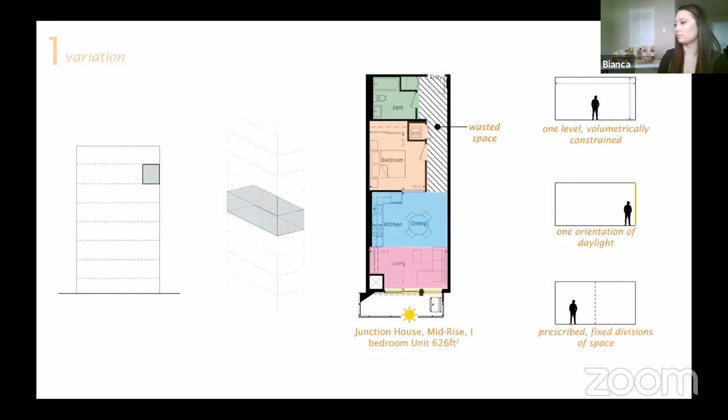This lack of variation can be overcome with what Bernard Tschumi describes as a new dynamic conception of architecture, where we reinscribe the movement of bodies into space.

When the body in space is dynamic, there is a need for attention to spatial, experiential, or behavioral variation.

The designs of our urban housing have made things easier, providing a sense of convenience. However, it has trained our bodies to maneuver around standard dimensions. And as our bodies adapt, it stops sending sensory signals to the brain.

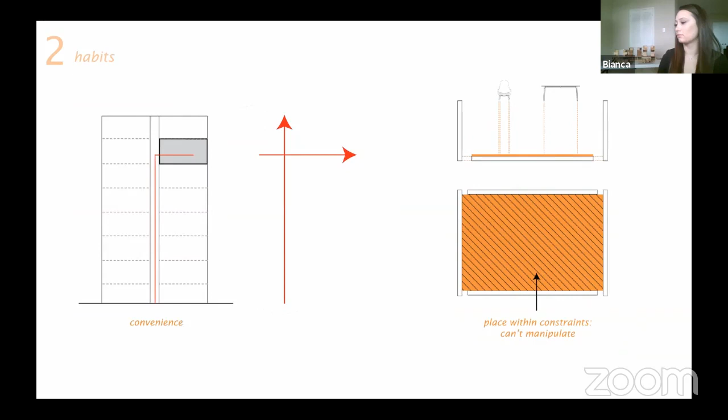It is then that architecture limits our actions and our bodies slip into indolence. It is when we treat our environments with little potential for affordances or action possibilities that our environments become limiting.

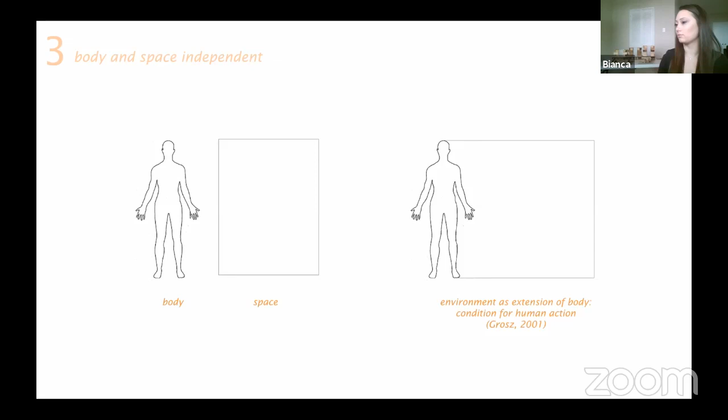By understanding that our environments are the condition for human action, designers can allow spaces to become extensions of our bodies, initiating movement and variation.

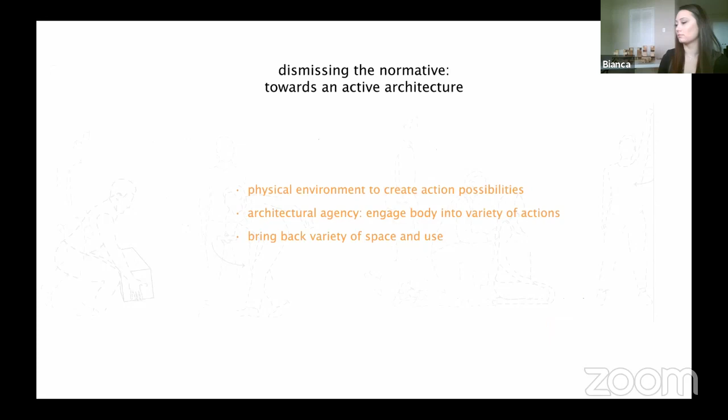To dismiss the normative ways of living in apartment housing, the role of the physical environment in creating action possibilities becomes essential, as it gives architecture the agency of engaging the body into a variety of actions, and brings back variety of space and use and well-being measures into urban housing.

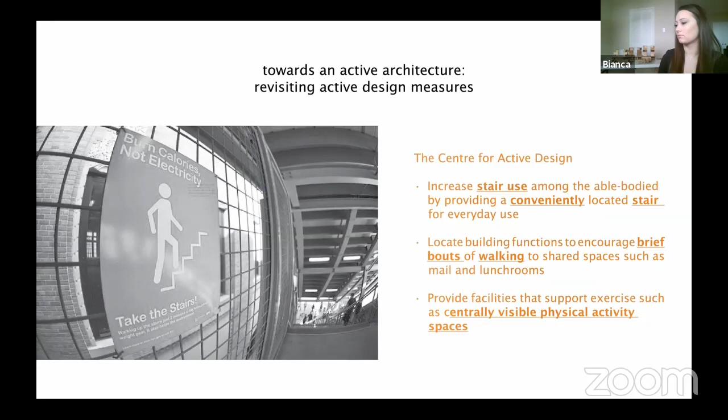To incorporate movement and well-being into our architecture, active design plays a role in providing agency to better our minds and bodies. Our current approaches to active design fail to incorporate the variety of ways which our bodies can move and their benefits. This new conception of active design engages the body through many different movements beyond walking, creating more continuity of bodily activity. This thesis tests how a new approach can use housing as an instrument for well-being, and how alternative amenities, qualities, organizations, and design of urban housing afford more physically active and socially engaged lifestyles.

James Jerome Gibson coined the term affordances so designers can understand its meaning as action possibilities within the environment, and that composition and layout of surfaces constitute what is afforded. Affordances help inform how space relates to behavior and evokes bodily sensory experiences. Most of Gibson's theory refers to affordances through the material environment.

Through design research, spatial and material affordances as it pertains to new housing forms that create new action and behavior were explored. The exercise challenged conventional apartment design by incorporating movement and variety through spaces which interweave, stagger, and afford different orientations, views, elevations, and ways of transitioning, allowing the body to behave in, use, and experience space differently.

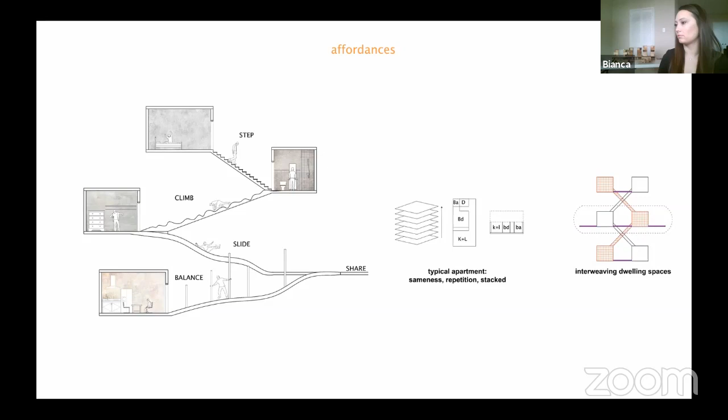To afford variety of movement, Gayle Nicoll states in her active design supplement there are three main physical movements critical for development and well-being. They are manipulative movement, which develops fine motor skills; non-locomotor movement, which focuses on the relationship of body to a place or object; and locomotor movement, which develops gross motor skills and movement of the body from place to place. Incorporating Nicoll's movements while addressing the question of circulation, design research examined active ways of moving through housing.

It should be noted there are limits to a degree of activity circulation routes provide and path of travel length. Providing variety and choice allows inhabitants to not be forced performing one action for too long of a duration.

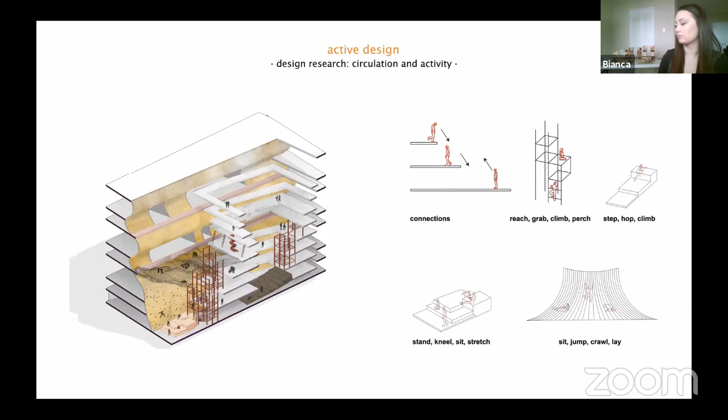Active lifestyles afford benefits beyond our physical well-being. They also inform our mental and social well-being through social connectedness and community. Shared living in this thesis becomes a method to promote active living and well-being.

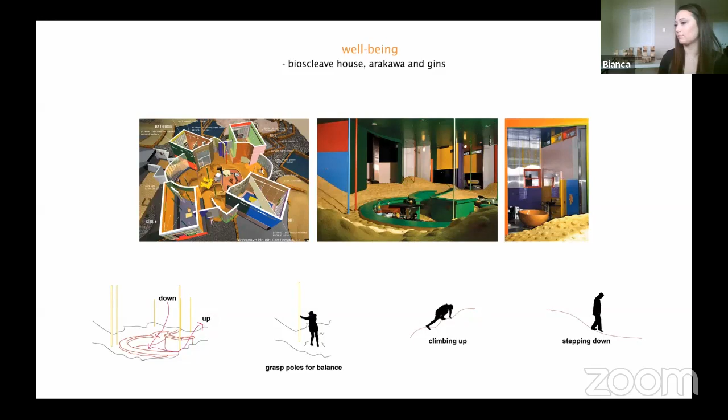To challenge our bodies and afford new movements, interior living environments can provide benefits to our well-being, as found in Bioscleave House. This home has steep and uneven floors with vertical poles to assist in navigation, so that the senses are challenged. It is important to consider challenging our bodies so new movements and experiences are afforded.

Movement can be created through flexible interior spaces and elements. For example, Maison de Verre by Pierre Chareau exemplifies spatial division using sliding, folding, rotating, overhead, and retracting elements. Through spatial and material flexibility, opportunity for bodily engagement and spatial variation are provided.

Design research explorations of bodily movement and spatial flexibility inform new relationships and organizations of dwellings. For example, Dwelling Study 1 on the left examines movement and hybridization of program and section, and Dwelling Study 2 on the right explores how access to light, air, views, and use of flexible elements can afford new movement and variety.

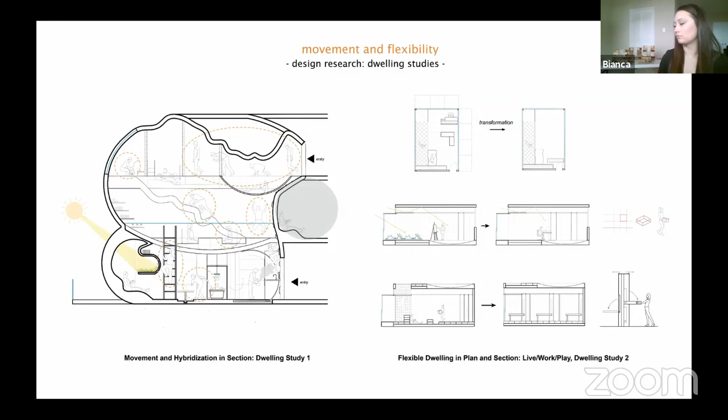Building forms which provide platforms for gathering and volumetric variety help promote active living through what their spatial and visual relationships afford. For example, the Mountain by Bjarke Ingels Group uses this strategy to provide homes sunlight, fresh air, and a view, and similarly, Star Apartments by Michael Maltzan Architecture incorporates public shared space through circulation and terraced floors of residences.

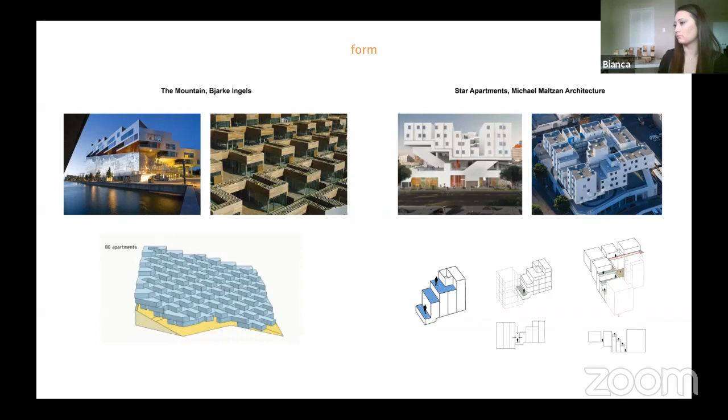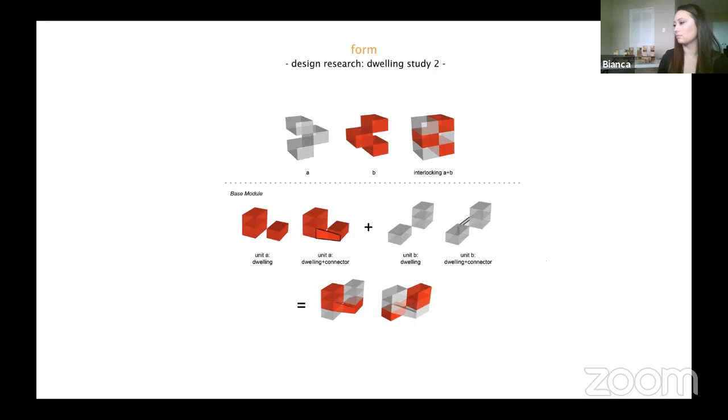To expand on this question of form, the second dwelling study investigates stacking and connecting of volumes to create interlocking apartments. The benefits of the new forms create access to light, air, and views, which creates relationships between people, space, and context. The design project applies this new knowledge to a mid-rise courtyard housing project, which focuses on

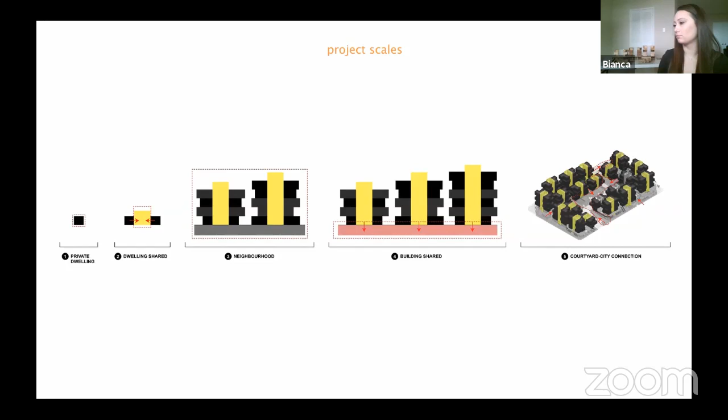5 critical scales, incorporating shared living and variety of environments which afford movement and activity. The design project is developed through 5 scales: private dwelling, shared dwelling, neighborhood, building whole shared spaces, and site, as the courtyard connects with the housing and city fabric.

At 183 Front Street East, located between the St. Lawrence Market and the Distillery District, the site is situated in a highly vibrant downtown neighborhood, encouraging with its diversity of programs such as food, entertainment, community, play, and more.

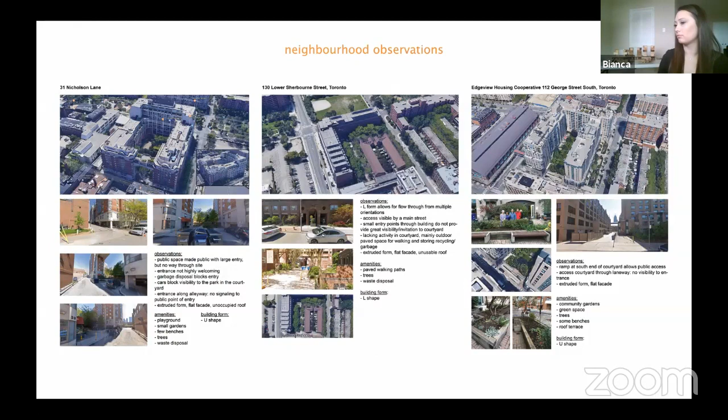Through analyzing the neighboring context, surrounding courtyard housing developments were critiqued. Observations found many issues with connection between the courtyard public space and the city, primarily due to poor access and visibility. To respond to this critique, the design project allows multiple orientations of entry to the courtyard, strengthening its relationship

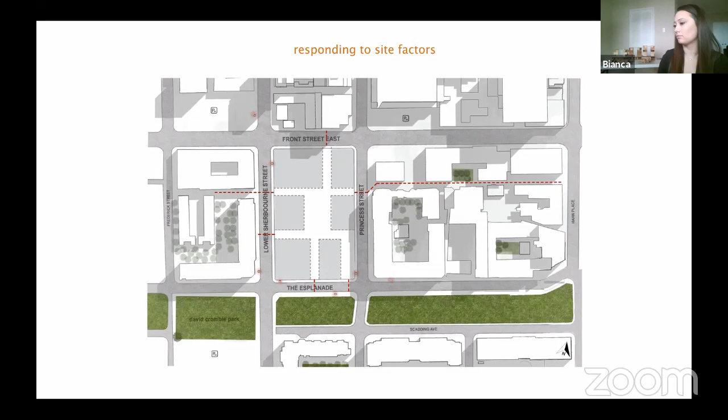with the city. The building form further frames the courtyard and connects with its surroundings, as apartment units are stacked and varied in height and orientation.

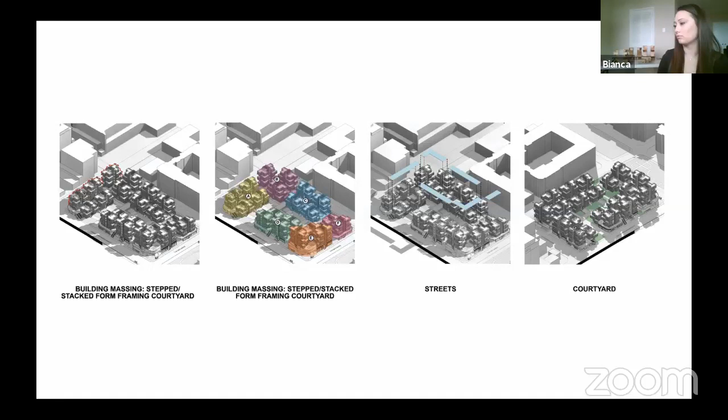Dwellings form neighborhoods which share an outdoor space which is referred to as a neighborhood street. These clustering of neighborhoods create two L-shaped buildings on the site, each which are connected by a ribbon that affords active opportunities for running, walking, and play.

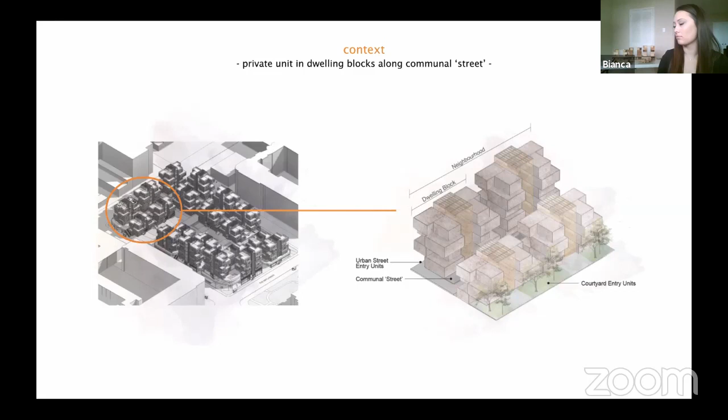The private dwellings are a component of a dwelling block, which is part of a neighborhood. Dwelling blocks vary in height, forming a stepped facade for access to views, light, and air, and frame the neighborhood street, which provides a gradient between the private dwelling and the public city. Each dwelling block has a shared vertical space for residents, shown in yellow, and private units protruding around this shared core, shown in purple.

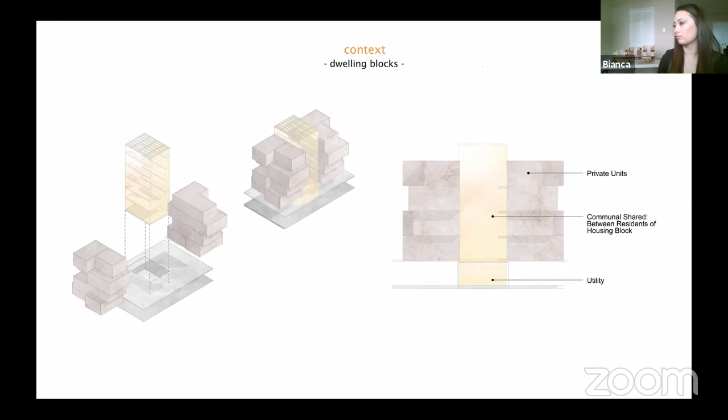At the scale of the private dwelling, flexible and varied environments are created to initiate action and movement, while allowing variety of space and use. The thesis project consists of a variety of unit types: a 3-story mixed block of 1, 2, and 3-bedroom units, a 4-story block focused on singles and couples, and a 5-story family block of 2 and 3-bedroom units. The following diagrams show different unit configurations within the dwelling blocks, highlighting different spatial volumes and orientations to view and daylight.

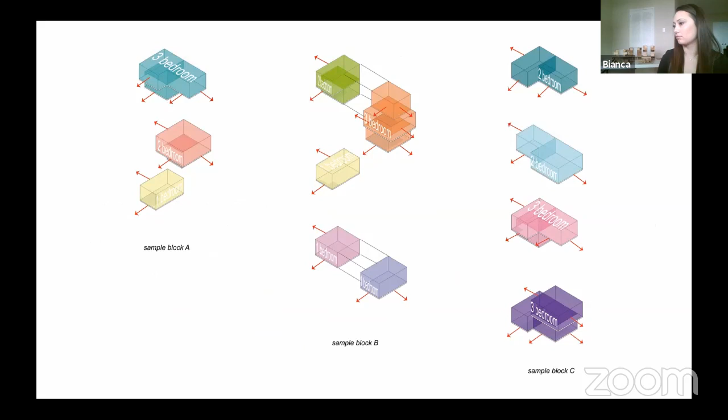Examining elements of movability and variety of space and use, two sample units will be shown: a 1-bedroom, 1-level unit, and a 3-bedroom, 3-level unit.

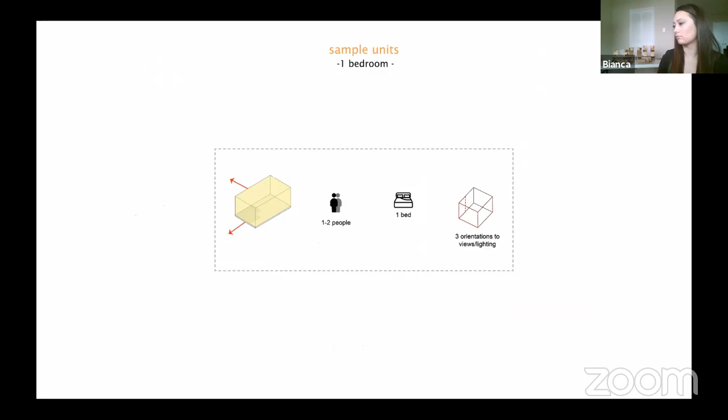The following 1-bedroom is 44 square meters and has 3 orientations to view and daylight. The unit provides opportunity for sitting, standing, kneeling, stepping, reaching, climbing, and pulling. Movable elements such as tables, beds, and roof hatches allow for movement and spatial and sensory variety, while the staggering form of apartments allows operable skylights for ventilation.

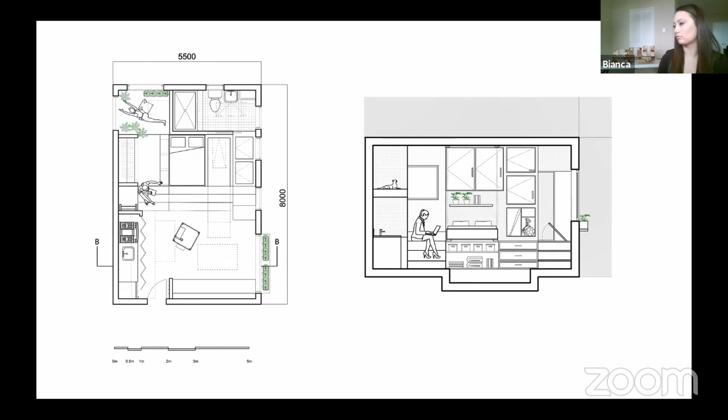Steps become a means of varying space as well as storage, and indentations in floors become a way of sitting and eating different from our traditions. The usability and degree of movement in this unit is much greater than typical apartments, and breaks past conventional designs focused on sameness and being static.

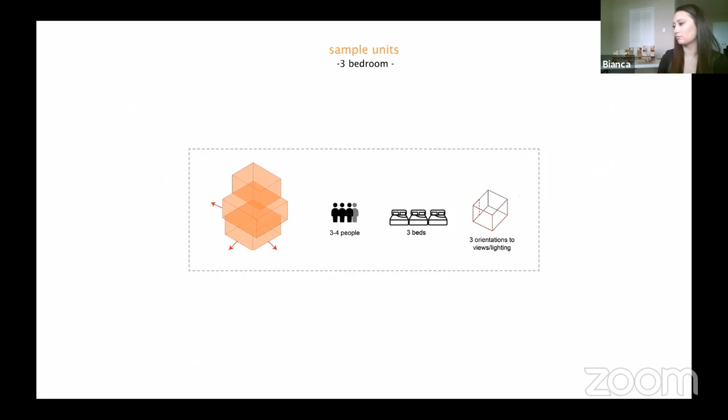A variety of volumes can provide a range of spatial opportunities for experience and use. The following 3-bedroom is 105 square meters with 3 orientations to view and daylight. The first of 3 levels of the unit has an atrium as one walks into the apartment.

A spiral stair takes you up to the second level, and there is a movable table which retracts into the floor, allowing the atrium to become a dining or open space. Three options for transition between levels of the apartment are provided: spiral stairs, ladders, and a rope climbing wall.

We typically step up into bed, but what if it were the opposite? The bedroom requires the body to step, push, pull, and climb. Our traditional methods of circulation should be challenged. A rope climbing wall on a track, which can fold up, connects two volumes together, exercising our physical movements.

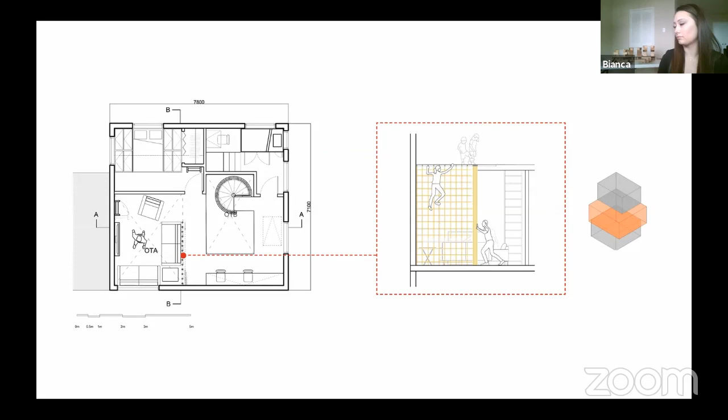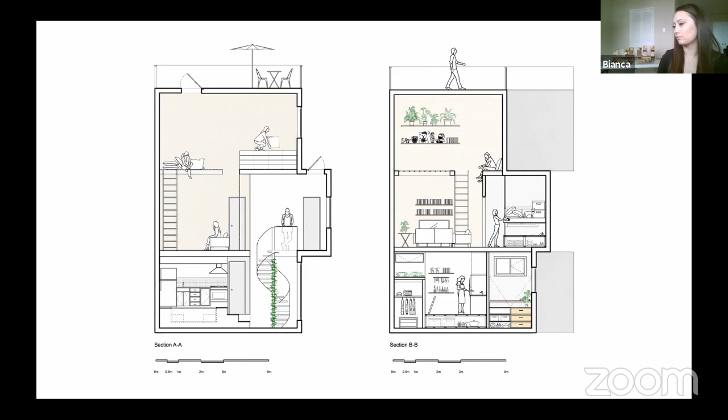And a net floor on the third level allows the use of muscle stabilizers since the rope has slight slack. Floors for leisure activities don't have to be solid, and the rope allows light, visual, and auditory connections to the activity below. The majority of Toronto apartments are 1 level. However, when volumes are varied, they create a range of active opportunities and spatial experiences, and afford new sensory experiences from access to light, air, and views.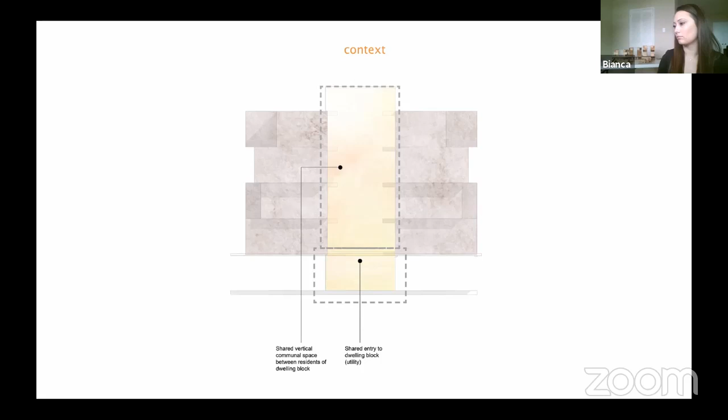The scale of immediate shared space between the private dwellings creates active opportunities and social integration. Each dwelling block shares utility space below with shared living spaces above. This scale informs how proximity of shared space and types of amenity among a small group of residents can spark interaction and can also be a place which initiates action.

The vertical space provides opportunities to eat together, move, and relax. Transitioning between floors affords options: stair use, climb wall, and an elevator. Direct visual access to the city and other dwelling blocks are present at the front and back of each dwelling block, further creating connection between residents and the city.

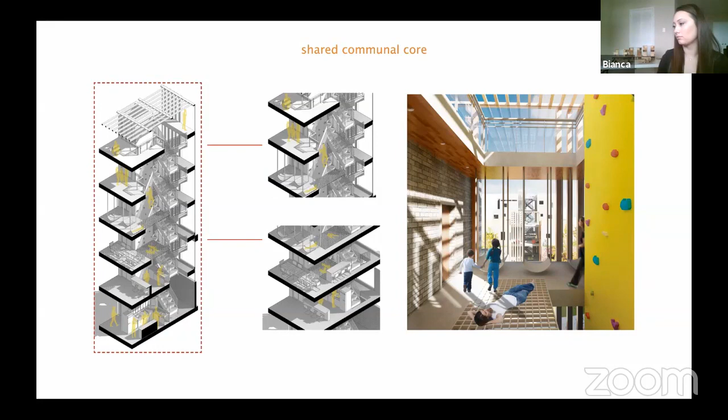Through use of material, color, views, and spatial volumes, comfort and connections are established. Stair use is encouraged, however choice is provided. The vertical shared core informs both physical and social engagement while providing access to daylight, views, and indoor-outdoor relationships.

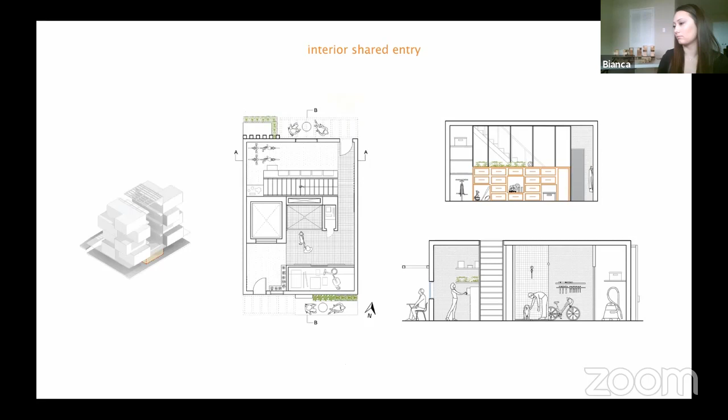Due to typically dull apartment entrances, the project provides each unit with a shared entry which affords utility and storage space. The entry to each dwelling block has a residential feel and is not only a threshold of entry, but a utility space, like a garage where things can be stored and showers can be taken to clean dirty boots, animals, and outdoor equipment, further adding functions to urban living spaces.

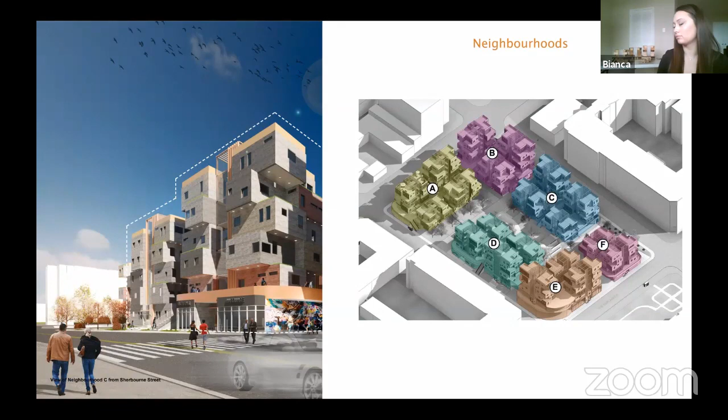At the scale of the neighborhood, groupings of dwelling blocks which form 6 neighborhoods further create connection between residents, creating gradients of social and active opportunities. This scale informs how proximities are important variables to improve lived experience.

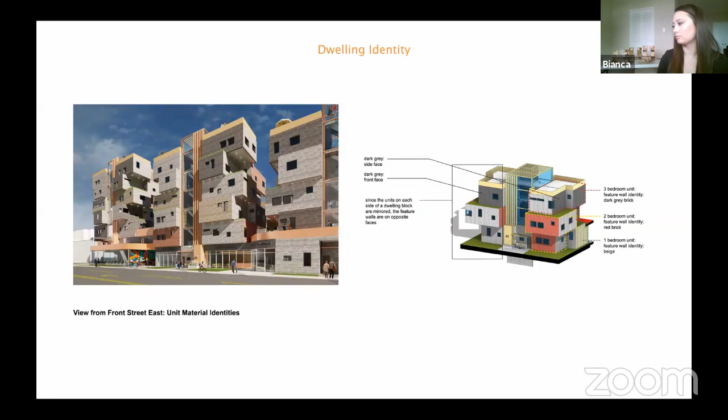Since the building form consists of a variety of stacked and shifted volumes, variation of apartments is necessary to create a sense of identity through the facade. Each apartment has a feature wall of dark gray, red, or beige brick to distinguish this individuality and variety.

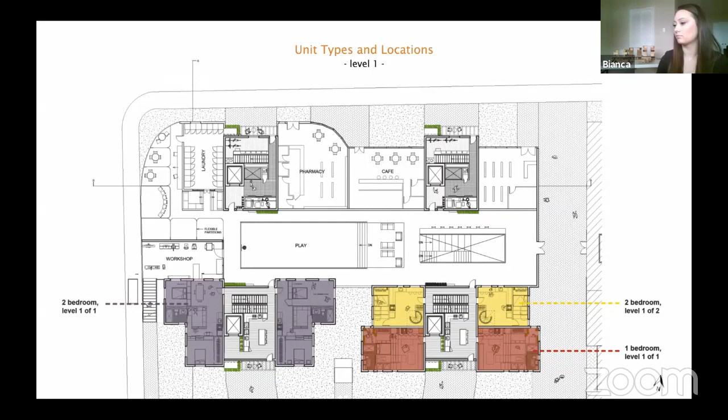Each apartment is carefully designed to establish relationships between private and public programs within the dwelling. 3 conditions exist between apartments which face each other.

The staggering forms of the dwellings allow for proximities between apartments, which afford privacy and comfort, and private programs within the adjacent apartments, which face one another, are designed to not have window heights at the same level.

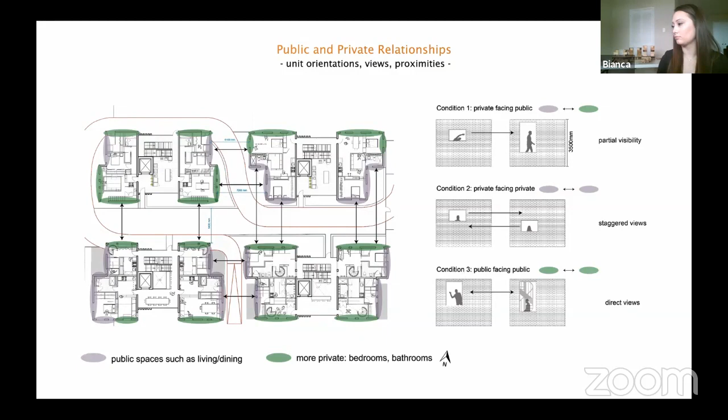Relationships between public and private views, as well as private and semi-private outdoor spaces, are established through the staggering housing forms. These relationships establish proximities between housing, the neighborhood street, the courtyard, and the surrounding city.

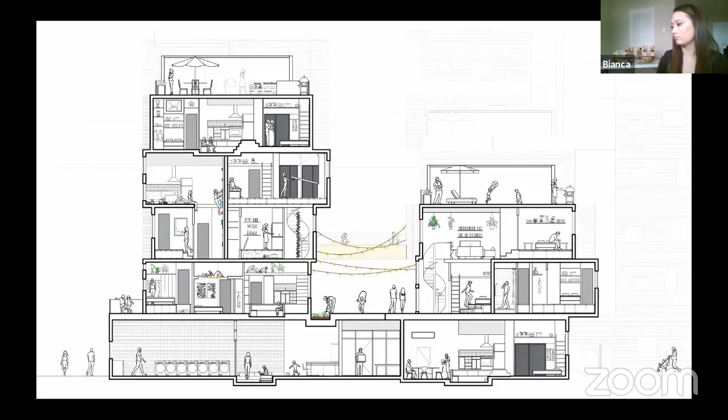The neighborhood street is an active and social space for gathering, gardening, and play, which fosters close-knit relationships. For communal meals, a few steps outside and fresh herbs can be picked.

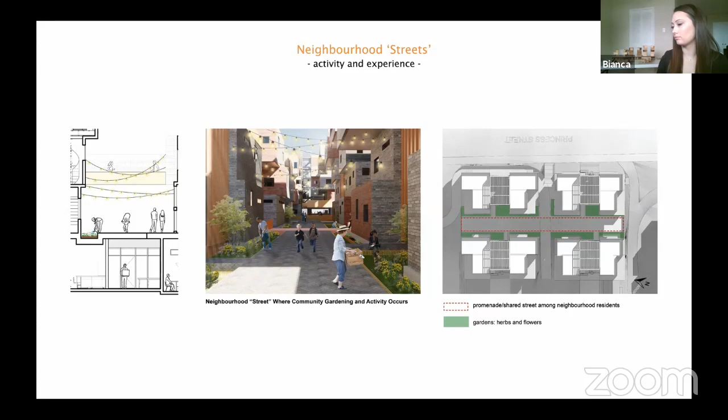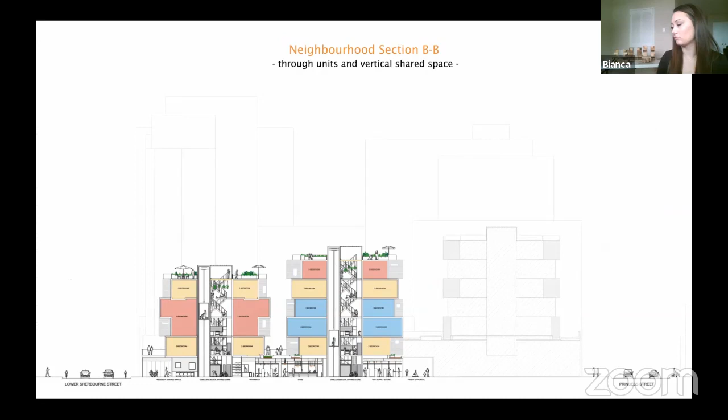A longitudinal section through Neighborhood A shows the relationship between the private dwellings and the shared vertical core. Below the housing, retail at grade, and the Front Street portal connecting Front Street to the courtyard are shown. The section examines the dynamic nature of the private dwellings and shared vertical core.

By providing small kitchens and dining spaces within apartments, the communal space between dwellings becomes common, social, and active interstitial space.

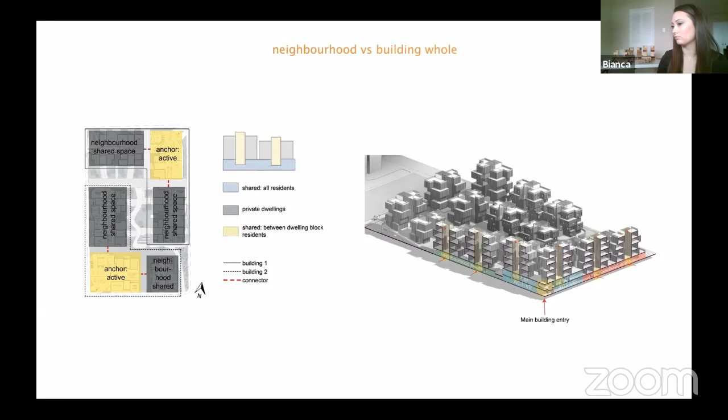The public and private spaces of the neighborhoods are connected at the ground floor of each of the 2 buildings. Corner neighborhoods are the anchor, acting as the main entrances, central active, and community zones.

The neighborhoods of each building connect below grade. This below grade passage is a transitional zone and a storage space to allow the ground floor to be solely for shared amenities. Active and social opportunities are afforded above, at, and below grade.

The ground floor plan highlights the relationship between the dwelling blocks and shared amenities below each neighborhood, with the corner neighborhoods acting as the active and community anchor. The arrangement of the building forms further frames the courtyard and affords access with the city.

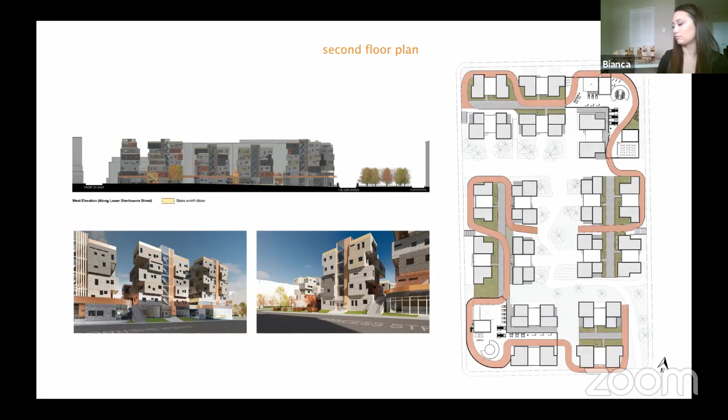The second floor shown highlights the second level of each anchor and the relationship of the ribbon to the neighborhoods and courtyard. Intermediate stairs allow residents to get on and off the ribbon and access the city.

The project encourages connectivity with the street level, and this scale focuses on integrating with the surrounding city through portals, additional crosswalks, and a public courtyard.

By creating an engaging courtyard with a variety of opportunities for walking, biking, running, sitting, and social gathering, active opportunities are present and inviting, not only to residents of the housing, but members of the city.

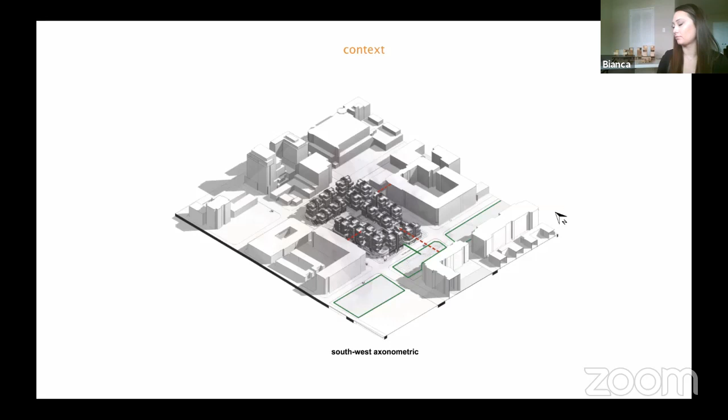Portals allow physical and visual access from the street level to the courtyard, and additional access through crosswalks improves active opportunities.

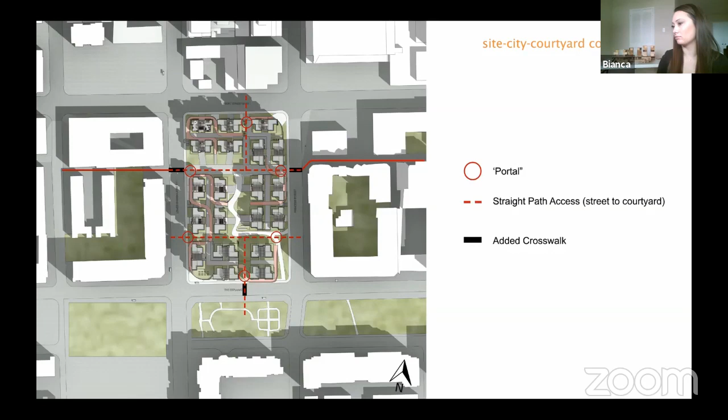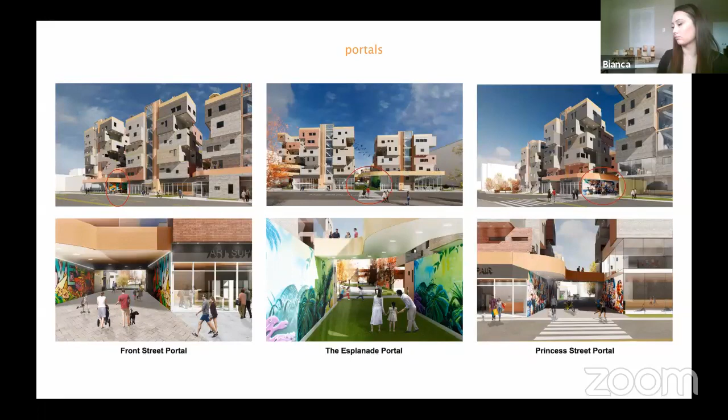The portals allow for multiple points of entry and exit to the courtyard, providing choice and navigation. Connection between the street and courtyard is established through physical connectivity and attractive murals by local artists that guide people to the courtyard. The portals improve connection between city and housing.

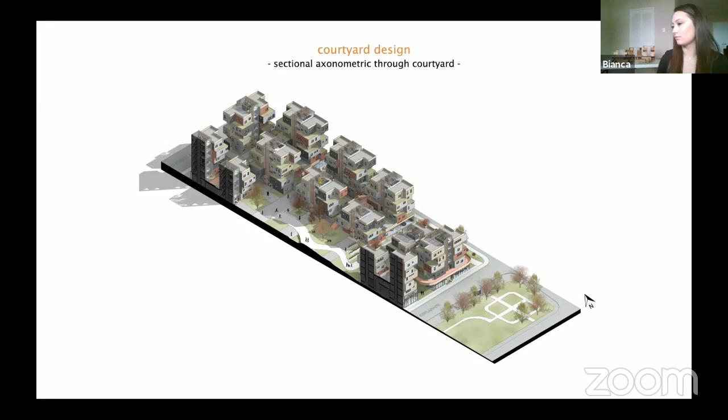The design of the courtyard further connects residents and the city through the portals, and landscaping guides users along the slope site to the adjacent parks.

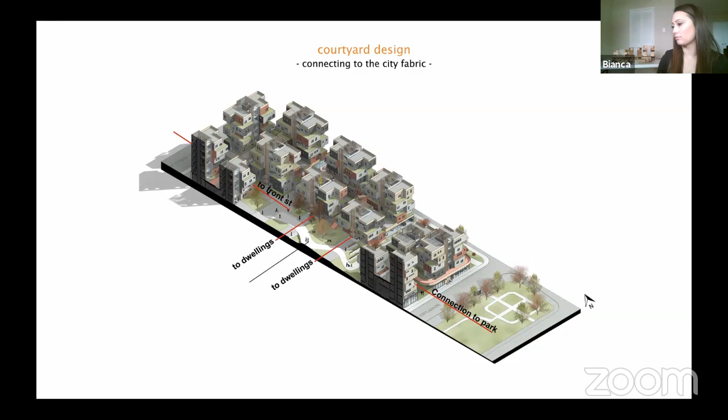The courtyard is designed to have access through to the city fabric, such as at the street level, laneways, and public parks, as well as provide direct access to dwellings through walk-up style apartments. The sloping landscape of the site guides people towards the park and provides a range of active and social opportunities.

To conclude, this thesis challenges our current notions of apartment housing based around sameness and lack of variety, and allows affordances to optimize how space is used and how active and social opportunities are provided. By being active, we create opportunities not only to strengthen our minds and bodies, but to allow for social connection, a vital ingredient for urban well-being.

When we look at active living in terms of shared living, we move away from the idea that your private space is the extent of your living experience. By balancing design variables for movement and spatial variation, the thesis found that new forms and relationships can create new behaviors, consequently creating a new way of living.

Variables for physical and social interactions include flexible interior environments, which hybridize spatial experience, use, and bodily movement. Gradients of shared spaces within proximity to the private dwelling afford variety of interaction and activity. Stair use is emphasized and associated with social functions. Choice of circulation routes and difficulty are provided. Visual and physical access to neighbors, city, and outdoor amenities such as parks are afforded, and good sensory qualities within the dwelling, such as high quality and access to light, air, views, and biophilia are provided.

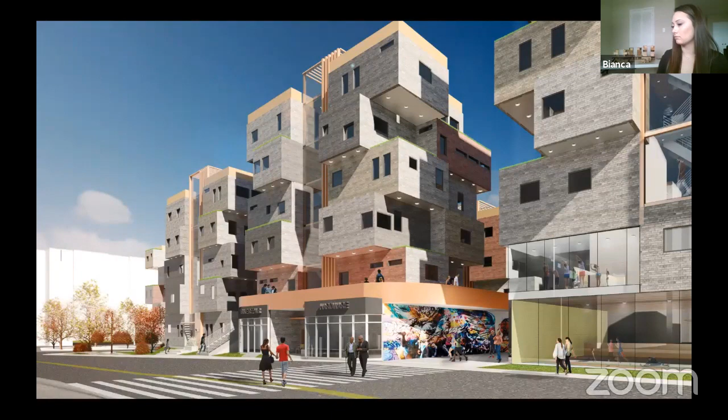Through the investigation of this thesis, it has become apparent we can no longer assume one standard spatial arrangement, and new urban housing forms require alternative amenities, qualities, and organizations which afford more physically active and socially engaged lifestyles. This thesis reveals how housing can help people be active in the city and the home and foster well-being for our minds and bodies. Thank you. Active urban dwelling.

Okay, thank you, Bianca. Sounds like that was on a loop. We're gonna get, I've stopped an instant replay. I guess we should leave your screen up in case people want to ask specific questions, and I'll go to the particular images. I'd like to invite our guest critics to start with any questions they might have for clarification.

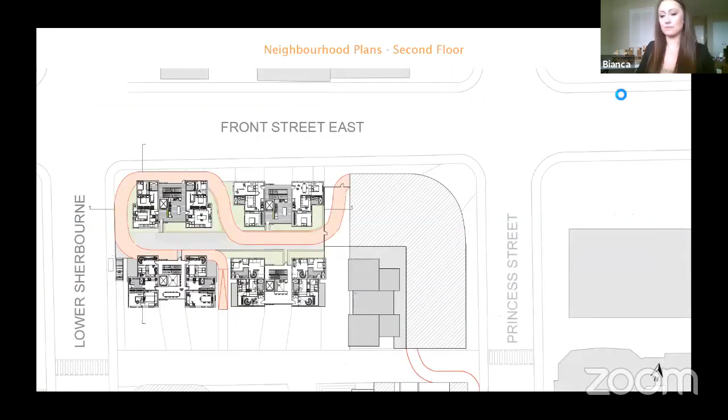And if there are no questions of clarification, then just proceed with the review. So Court and Anne, if either of you are ready to kick us off. Well, I have a question. I'm not sure it's clarification, but I'll ask it anyway. First, thank you for your presentation. It was very well done, quite frankly, very nicely done. And the subject is a fascinating subject and completely and very pertinent.

The question of living in housing is huge, and I'm afraid it's changing now, but anyway. And the idea of standard design is something that has been very present with us for quite a long time. There's two issues that I think your thesis is challenging, and I was wondering if you looked at that or not. There's the challenge of universal accessibility, and it's also challenging liability, professional liability. So I was wondering if those two, and maybe it's somewhere in your bibliography, but I was wondering if it was there at all.

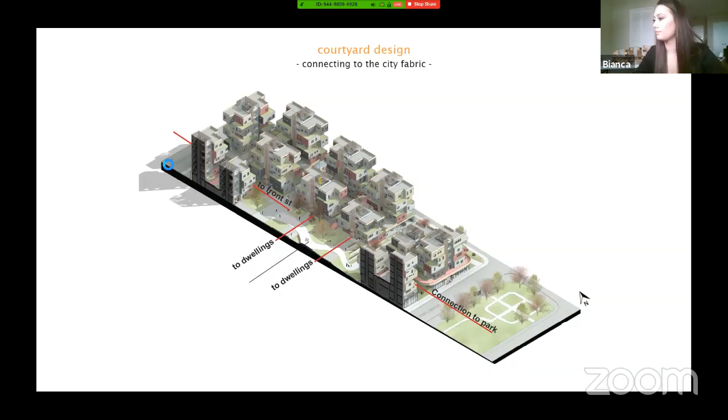The idea with this was that it's kind of like an extension of an outdoor walking path, also connecting these neighborhoods together. Didn't want there to be a harsh line between the city and the housing, having this interstitial gradient of circulation, so there's outdoor space where people can choose to be a little more private rather than going for a walk in the city. When I was talking to my supervisor, it also provides an option in a pandemic situation where you want to go outside but don't necessarily want that much exposure. So it's this halfway point with a whole bunch of options, allowing you to go indoor and outdoor, and also to the different neighborhoods, meaning some more social mixing.

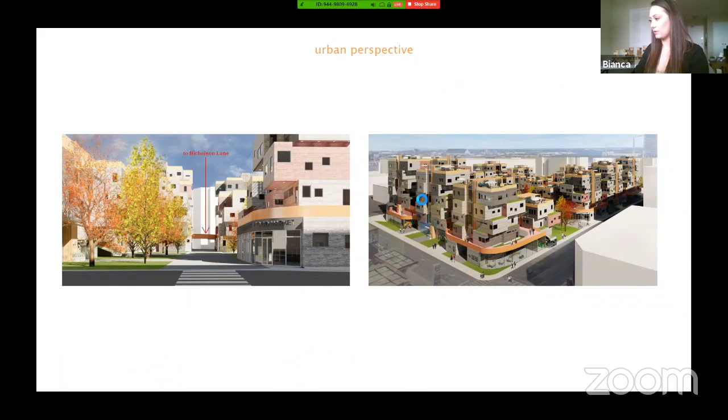So this is the outdoor street - this is the pathway, a paved outdoor space, and this is the gardening, the green. Sorry, I missed the inside-outside part earlier when you were talking, I thought there was a tube of inside in that location, but let me bring up that street.

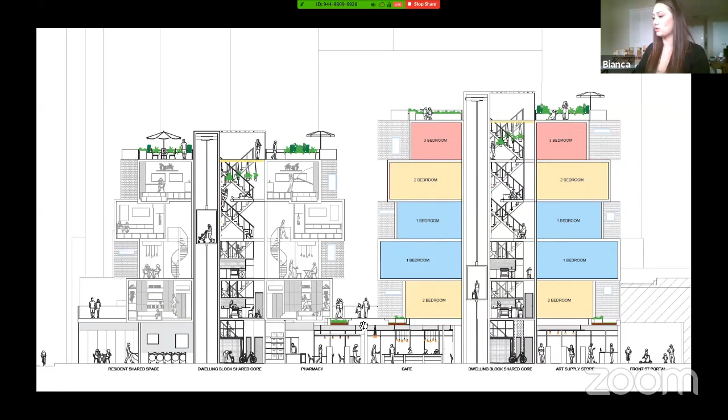If you just hold on this image - the section on the left, with the two individuals standing and socially distancing themselves on what appears to be a balcony or a bridge? That is the pathway, the red pathway, elevated above the podium level. This is all at the podium level, on the far left of the drawing.

So to clarify, the ribbon is ramped, so it changes level - is that correct? It's all at the second level, except it ramps down to the courtyard, that's the only part where it changes elevation, to give that access to the courtyard. And can you access it from grade, datum point zero? So you can go up two levels basically to get to the highest level of the red path - this is at the top of the first floor, so it's podium plus one.

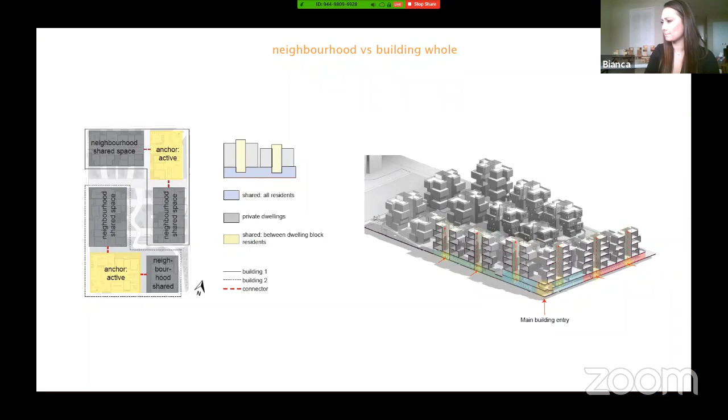I have another question about the grade. You've got grade-related units, both on the court - some entered off the street other than Front Street, and some entered off the courtyard. Yeah. Because just quickly looking at some of the elevations, you don't see any doors on the street. It looks like we're always looking at...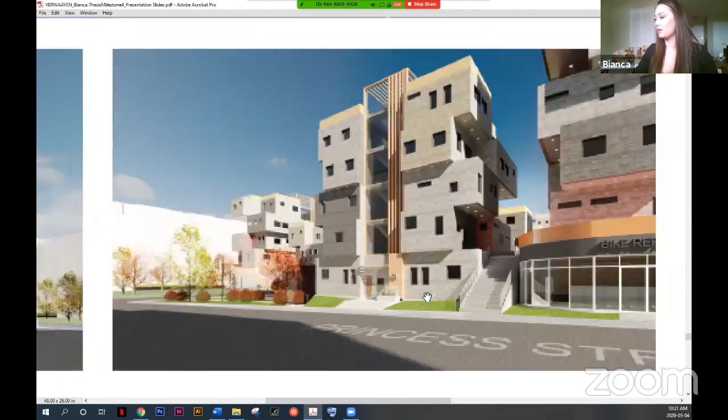In this one, yeah, I'll just zoom in here. Oh, there is a door there. Yeah, so it's stepped and recessed back a bit, and there are doors. So that's typically the condition on both Princess Street and the other three streets besides Front, correct? Yeah.

Although you've got retail also on Princess Street. It's kind of mixed up a bit. Yeah, here, this is where the courtyard entry ones are.

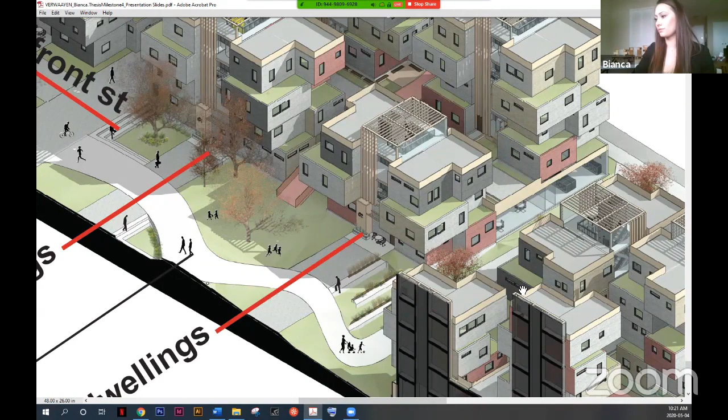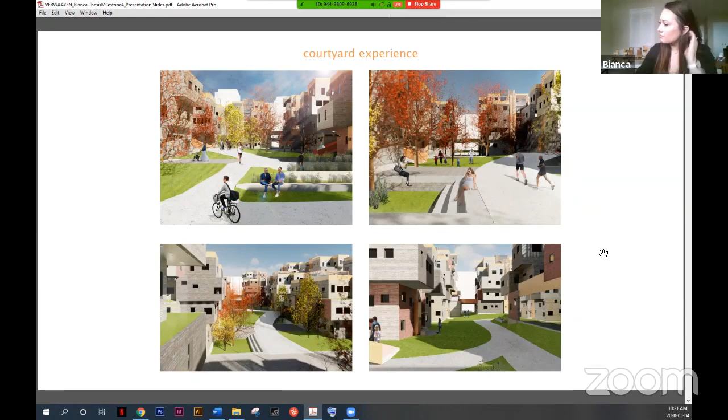One of the things in terms of accommodating elderly people or people with accessibility issues, they could be in the grade-related units. There's kind of an evenness though in the way you approach the elevations - Front Street's got more retail, but you seem to sprinkle retail around and mix up grade-related, townhouse-like units with the backs of other units, sort of back-and-front issues.

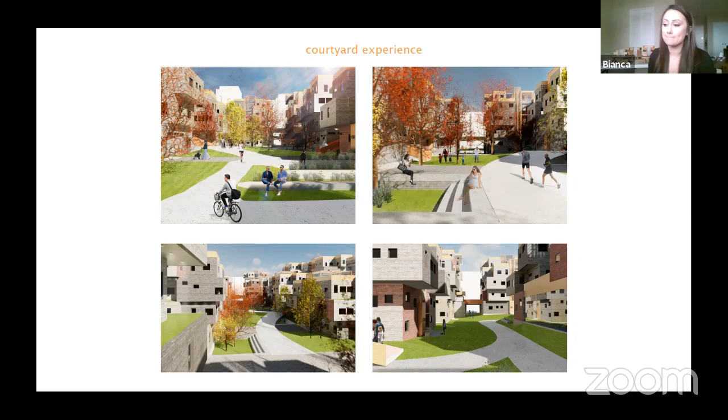I think if you were more clear about the relationship of those units - maybe they have an internal elevator that gets them up to the second level, so they're also connected - the elevator would go down to the level of the street and the courtyard, always through the internal shared lobby space, correct? Like the townhouse-like units have to get up to grade somehow to enjoy that, so they'd have to go outside of their unit into the lobby to connect to the shared space, I think.

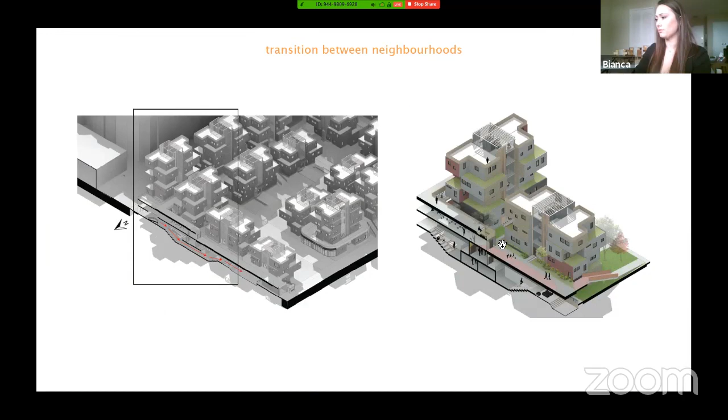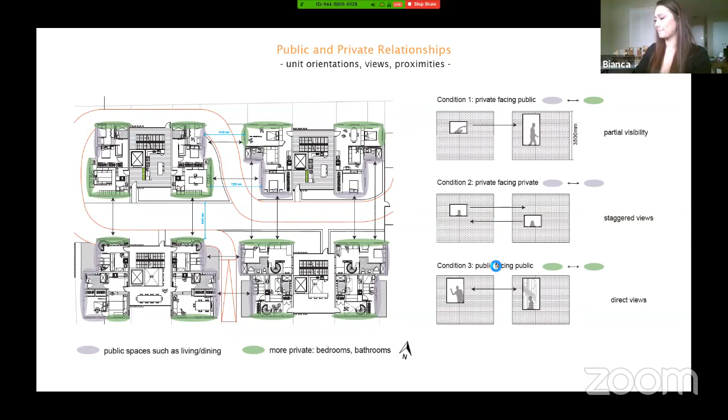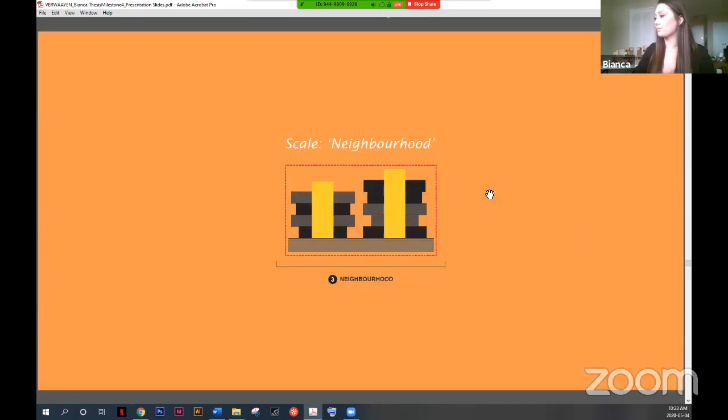Let me just bring up the plan. I guess it's an issue of figuring out the relationship - seems most units enter directly off the lobby, but they could have a second entrance to the street, correct? So here is a plan of that entry, which would be coming either straight from the courtyard, depending on which way it's oriented, or straight from the street. So either way, there's two entrances, which can be approached either way.

Okay, but this is the lobby, the common lobby. I'm talking about the grade-related units that you can enter directly from the street - do they also have direct entrances to the lobby, or would they have to leave their unit and go down to... Do you mean the lobby, this is the lobby, or?

Yeah, that's the lobby, the common lobby. This is what you would enter from the street.

I'm asking about the grade related units with doors directly into them, the ones on Princess Street. Like the actual dwellings themselves? Yes. So if I'm an elderly person and I have a unit I can enter directly from grade off Princess Street, but I want to get up to the second common podium level, do I have to leave my apartment, go outside, and then back into the common lobby to get up to the second level to get an elevator? I think I'm understanding your question.

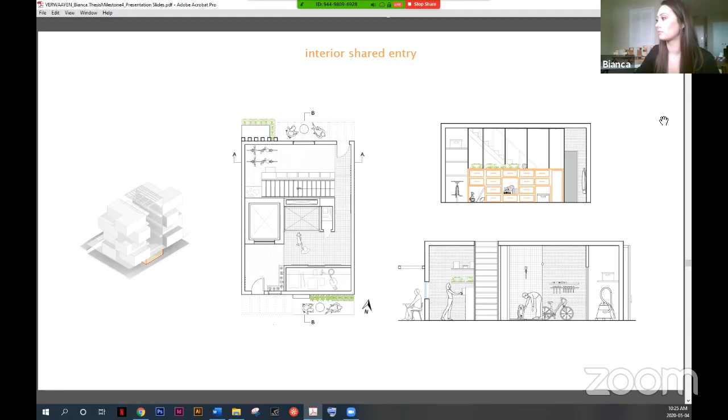Bianca, could you go back to like the larger site section or a larger building section? Because I think that might help us talk it through.

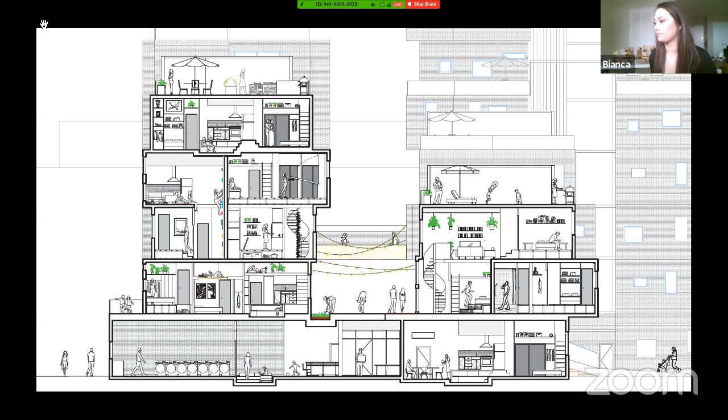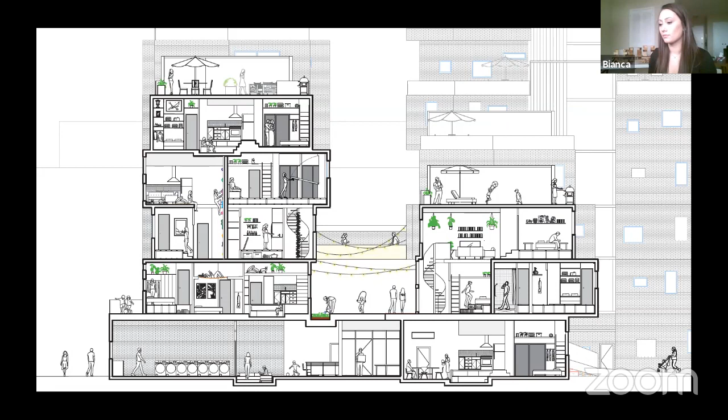Yeah, that's great. So what exactly is happening at, let's call it, the at-grade podium, I guess is the term. It looks like there's a laundromat maybe, and I believe I saw something about a cafe in a previous plan. How does commerce or restaurants, for me it comes into the term of third places, from sociologist Ray Oldenburg, but are there places that are maybe in between the commune of the living space and the rest of the city? It just seems like you didn't really touch upon that. I'm just curious what your thoughts are.

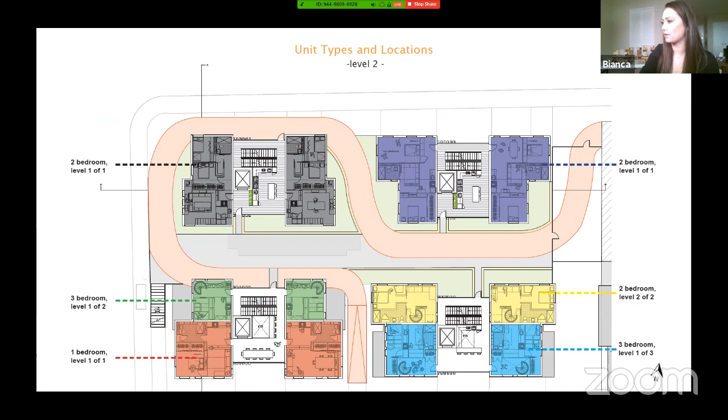I was just curious, because you are consciously making an effort to break down boundaries of thinking, right? In a way, what you've done is you've turned that traditional sliver of life amenity level, which usually has a gym nobody really uses and maybe a movie theater people occasionally rent with a deposit, you've turned that from a pancake strata into something turned on its side, where the shared space is now vertical and shared vertically. So I was wondering why there wasn't a bit more pushing on the ground plane, because you could have a cafe that becomes the lobby space, or was there a reason for that? Is it because of privacy?

Yeah, I would say that's probably why it was kept separate, because part of this thesis looked at how much you can merge and blend together, since blending of spaces was part of the exploration. It's not necessarily practical to blend everything; public and private need some sort of limits to the gradients of how much is public versus private, the city versus the residents. So I tried to give the residents that blend without it compromising too much privacy.